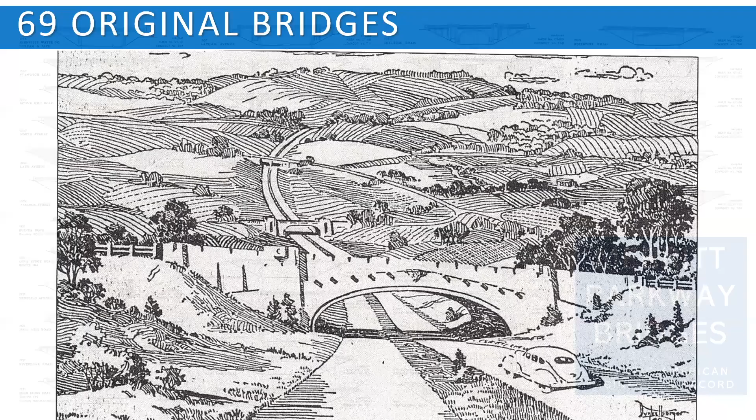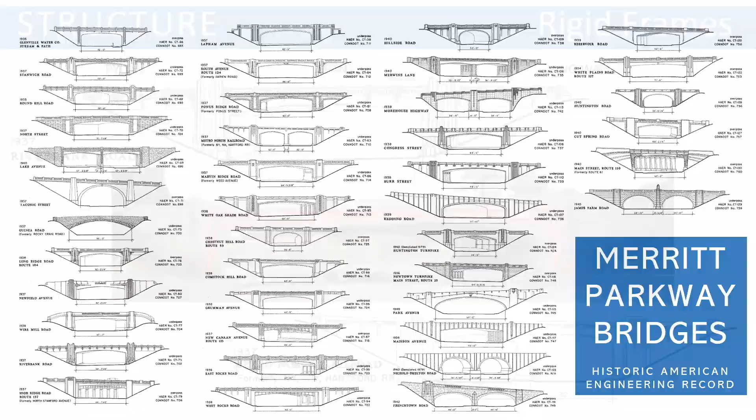Each of the bridges on the Parkway was done to a different design. No 2 are alike. They deploy mostly the same structural system, but they are given a completely different architectural treatment. Tonight we're going to focus on how the architect who designed them really dressed them up in different ways.

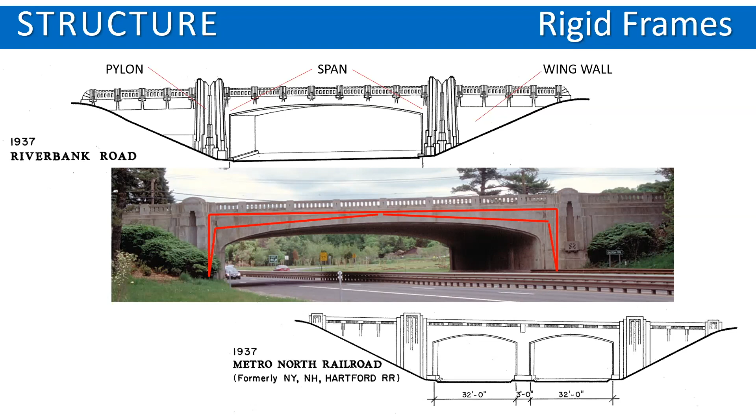The structural system that is used is no longer used in constructing bridges, but it was a very modern system in the 1930s. It's called a rigid frame. In the center image here, the red lines outline the shape of the steel that's embedded within the concrete. So these are a form of reinforced concrete bridges that have structural framing within it that's made out of steel. As you can see, the way that the steel is laid out, because it gets narrower towards the center of the span, it lends itself to forming the openings as arches. The architect of the Parkway Bridges made very good use of that arched form throughout the Parkway Bridges.

There are some other structural systems used in very minor quantities on the Parkway. These are all contemporary with what was going on in Europe at the time, the German Autobahn, which is up in the upper left-hand corner. That would become the design standard for the interstate highway system in the 1950s, but it wasn't really used on the Parkway. You can look up at the upper left corner and see the future that was going on in Europe, but it was actually rejected by the design intent of the Merritt Parkway.

There are a couple of basically post and beam bridges, and one of those is at Riversville Road. You drive over that when you're on the Parkway, so you don't actually see it unless you're underneath the Parkway. And there are only a couple of structural arches that are used on the Parkway.

One of those is the Guinea Road Bridge in Stamford, which was one of the earliest bridges. The Parkway Commission that oversaw the work originally wanted to dress up most of the Parkway bridges in stone, but the cost of this bridge came in so high that they decided they would go to concrete afterwards to save money.

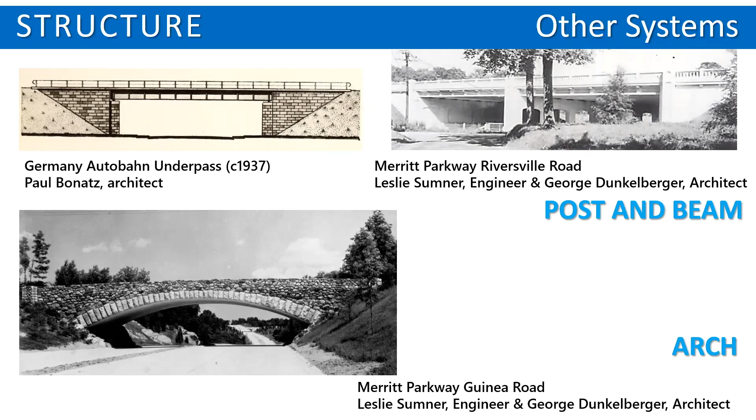It was designed in conjunction by the civil engineer on the project, Leslie Sumner, who was a brilliant civil engineer who did many, many other bridges around Connecticut, and George Dunkelberger, an architect whose primary body of work is limited to the Merritt Parkway, to the bridges and the service areas that were originally designed as gas stations on the Parkway.

One of the biggest accomplishments, the largest span and the highest span that the Parkway needed was across the Saugatuck River—not necessarily the largest river in Fairfield County, but where the Parkway met the river, it didn't make sense to bring the Parkway down to the river and go with a smaller bridge. So they spanned it with a larger type of bridge called an open spandrel arch system.

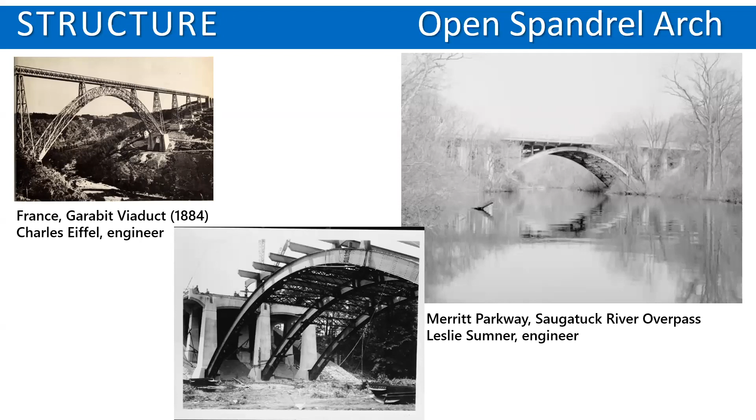That was pioneered by Gustave Eiffel of the Eiffel Tower fame and used about 50 years later on the Parkway. It's the same structural principles. It's a very beautiful bridge, but you only really get to see it if you're in a kayak or canoe down on the Saugatuck River. You drive over it most of the time without ever knowing you're on this beautiful bridge. The architect was George Dunkelberger.

He was a native of Camden, New Jersey. He came up in a working class family. He went to Drexel Institute, which was one of three institutions set up to help people of modest means get an education in a practical profession. Drexel is like Pratt Institute and Cooper Union in that sense. Drexel was different because it gave a very rounded, liberal arts menu of courses, as well as what you wanted to focus on. Dunkelberger focused on architecture, but he got a very well-rounded education there, so he was pretty well read in the classics and other things.

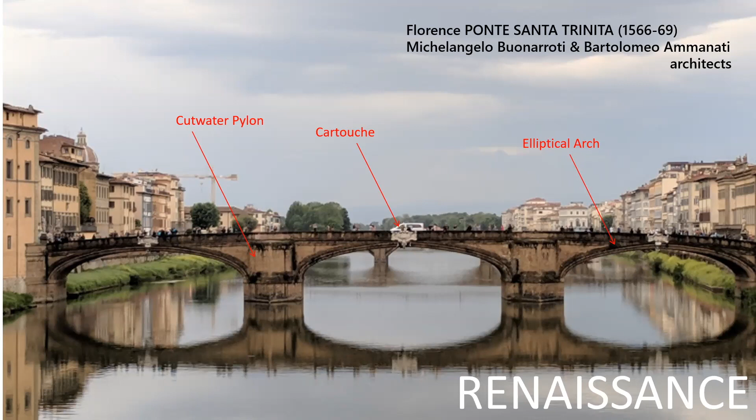In the center of the span, Renaissance architects often used a feature called a cartouche, some sort of medallion, a symbolic medallion that had maybe the city symbol on it or some inscription. Michelangelo used one here, and Dunkelberger used the State Seal of Connecticut as a cartouche on many of the Merritt Parkway bridges.

The very famous New York firm of McKim, Mead and White had just finished the bridge that runs between Washington, D.C. and Arlington Cemetery, done very much like Michelangelo's bridge, with large elliptical arches and medallions and relief sculpture in between the piers. Dunkelberger uses that same sort of treatment on a couple of bridges.

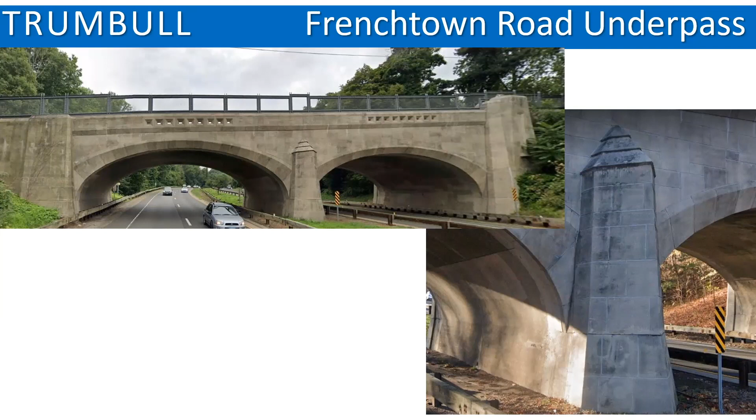In Trumbull, I mentioned cutwaters before. The Frenchtown Road bridge has one of those cutwaters, and obviously it's not dividing any water, but it's just an architectural feature found in many Renaissance bridges in Paris, Italy, and London. This is all cast stone. It's a very, very beautiful bridge.

Another thing the Italians did in the Renaissance was ornament their bridges, beginning in Venice, with relief sculpture—using the bridges as a canvas for three-dimensional relief sculpture symbolizing different things, not just cartouches, but actually embellishing them. You'll find this a lot on the Merritt Parkway bridges, which we'll be looking at in a minute.

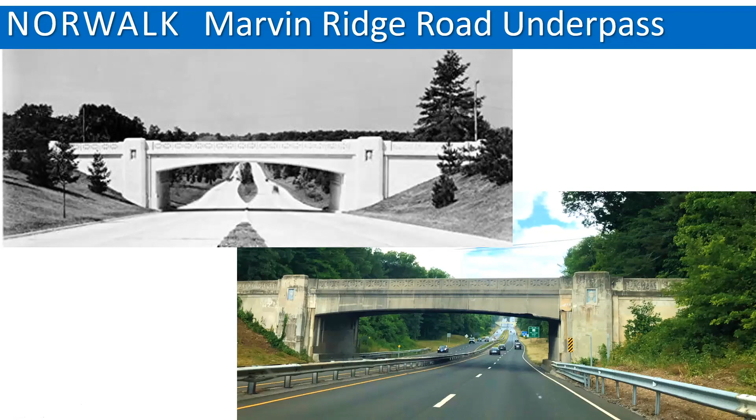The Marvin Ridge Underpass in Norwalk is one that's scheduled for restoration beginning next year. It is a bridge that has a balustrade that's really all solid concrete, and the only decorative feature on it are these little inset urns set in a blue field that will be restored as well. So that's the kind of relief sculpture that Dunkelberger did in his more simple and pulled-back mode. Here it is, a detail of it, sort of a neoclassical Adam-esque urn.

Then we move on to the Art Deco bridges. Dunkelberger was taking a lot of his ideas for massing the terminations of the spans, where they either met at the median or over on the shoulders, from contemporary architecture. Rockefeller Center and the New Yorker Hotel really convey the way urban planning was moving toward having a lot of setbacks in skyscrapers, creating these heavy buildings with dramatic shadow play of setbacks and sculpture. Even contemporary sculpture was starting to imitate that. So Dunkelberger was riffing on all of that in the way he modeled some of his less classical and some of his more Art Deco bridges.

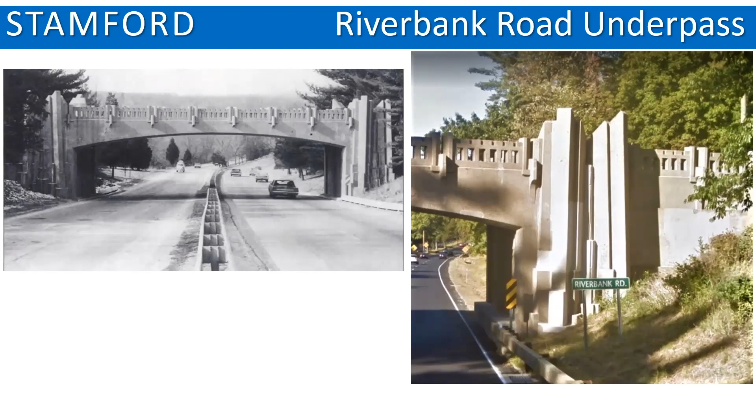Riverbank Road underpass is a very chaste Art Deco. You can see how where the bridge hits the shoulders, called wing walls, Dunkelberger sets them back in a series of receding planes on this bridge. That's very simple, but not really done at all commonly. It didn't really cost all that more, but it adds a lot of architectural interest to what would otherwise be a pretty simple concrete bridge.

Then with the pylons holding the span, where all the load is being transferred, he puts in these very simple vertical flutes. So it's a wonderful composition with a lot of cool shadow play on it. This is what it looks like today in a photograph, where you can see some of the horizontal elements a little better, and some rounded elements on the balustrade, and also a cartouche in the middle of it.

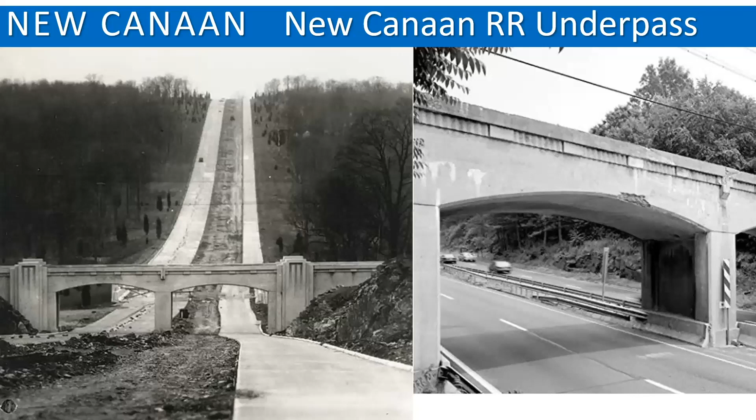The New Canaan Railroad underpass is where the Metro North Line to New Canaan crosses the Parkway. Because that was a much heavier bridge, he put a center span in on the median. Only a few bridges have center spans on the Parkway, and this one was because it carried a railroad train across it. But it's still a very simple and elegant Art Deco design.

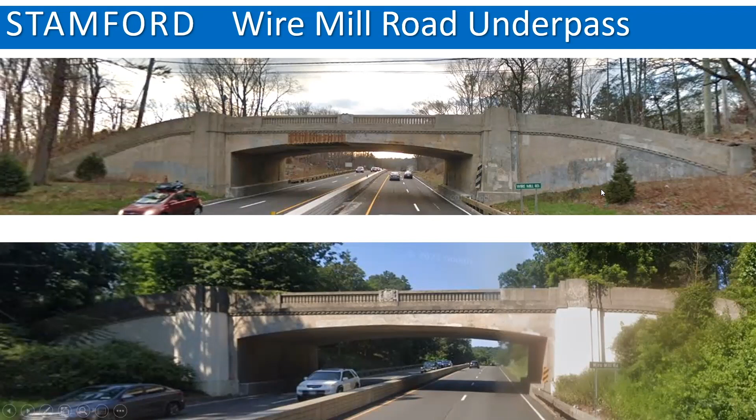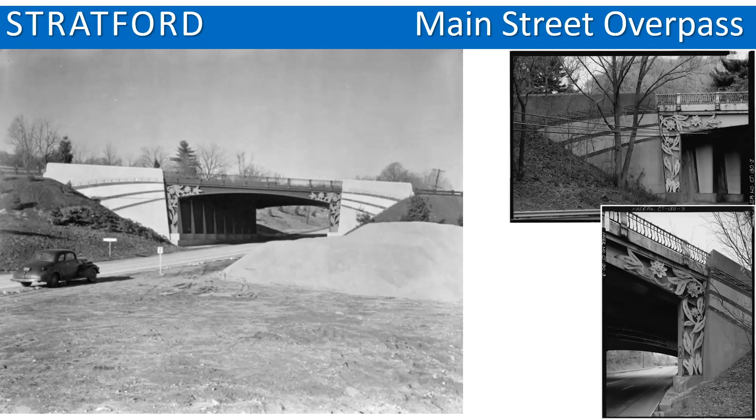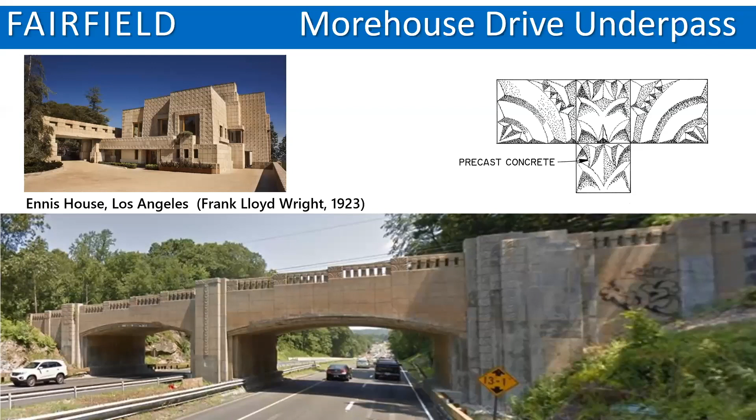Frank Lloyd Wright had designed a building in Los Angeles in 1923 using precast blocks with a kind of Inca-Aztec motif in them. And the Morehouse Drive Bridge that Dunkelberger designed takes its cue from that in the railings and some of the treatment on the bridge. It's really quite an interesting and unusual bridge.

It sort of stands apart from all the other bridges on the Parkway in its shape, and it steps up the hill to make a change in grade between the two sides of the Parkway, with this very primitive-looking form of decoration.

The relief sculpture that I mentioned that came from Paris is all over the Parkway bridges in different ways, the urn we saw earlier, the fountain motif. It's just a feast for the eyes. When I was in high school driving it for the first time, it seemed like every couple of days I'd notice a new bridge, or a bridge I'd gone under many times, but I'd notice it because the light would hit it differently and the details would pop. I think it makes driving a real pleasure on the Parkway.

It was also common during the 20s and 30s to introduce relief sculpture symbolizing different aspects of Western civilization onto buildings. At Rockefeller Center, the design team had a history of artisans and tradesmen on a band around the base, representing the different trades that went into constructing the building.

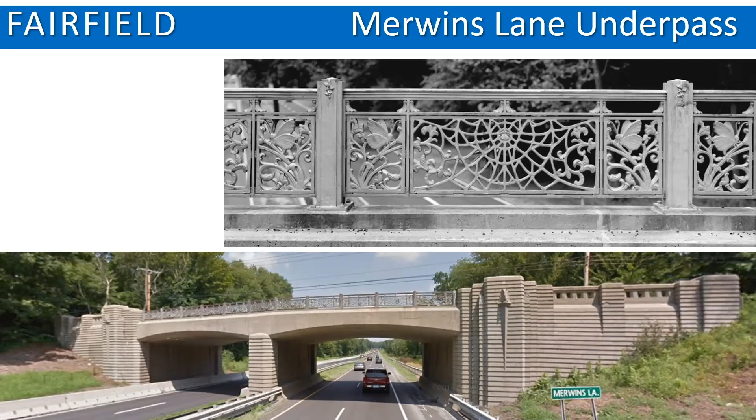One of my favorites is Merwins Lane. I've always loved this bridge. Instead of just having relief sculpture like some of the earlier bridges, this bridge almost becomes a complete work of sculpture in itself. I'm not really sure if he was trying to simulate waves of water, or a kind of wave of textiles across the bridge, but it looks like a folded textile. It looks almost like it could just be blowing in the wind up there. It's really quite a beautiful bridge, but with just a couple of little classical references in the wing wall. A very, very lovely bridge.

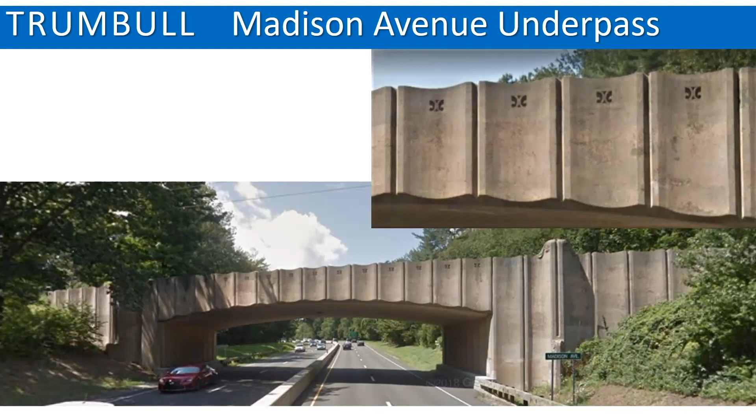I want to walk you through a couple of restoration projects we've done recently. If you've seen projects where we've done patching, sometimes when we come to a bridge that doesn't need a lot of patching, we'll just do cleaning. The science of cleaning has gotten quite good and portable. The bridges are blasted with pieces of sponge, and the sponge absorbs all the surface dirt and pollution without eroding the surface of the bridge.

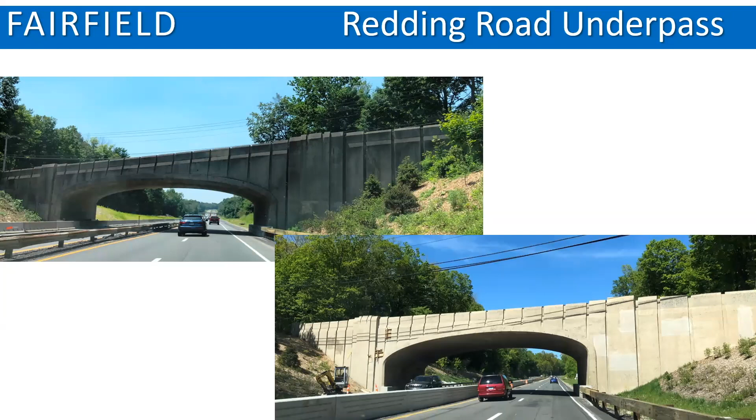This is the Redding Road Underpass, a very simple but elegant bridge in Fairfield that was sponge blasted about two years ago. Here's the before and after, showing how well it cleaned up.

One of the major bridges we recently did was the Lake Avenue Bridge in Greenwich. This was one of the last bridges put on the Parkway, and it was unusual because it had more cast iron than all the other bridges. The steel span had been determined structurally deficient since about 2012, when we went in and did material investigation on the ironwork to try to determine the original paint scheme. We found traces of the paint.

We hired an architectural conservator from New York. She took samples, looked under the microscope, and matched the colors of the original bridge exactly, and that's how it turned out. This bridge was completely taken apart, all the cast iron was taken off. Cast iron is very brittle, and we were afraid it would break, but the contractor was excellent and handled it with kid gloves. They took it to a shop, had it sponge blasted down to bare metal, and then painted with numerous layers matching the original color scheme.

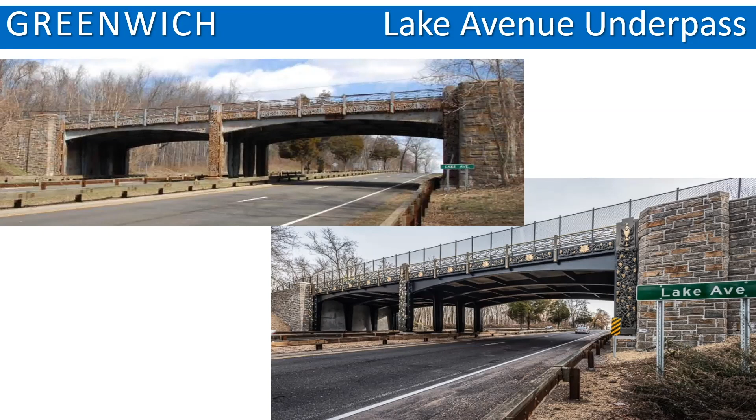The bridge was completed ahead of schedule, which was really important because the entire span had to be taken out of service for the period it was being restored. It was a happy day when the Conservancy, DOT, the contractor, and local politicians all got together, and we reopened the bridge about a week ahead of schedule. The bridge was used by school buses, which could start rolling again without a very elaborate detour.

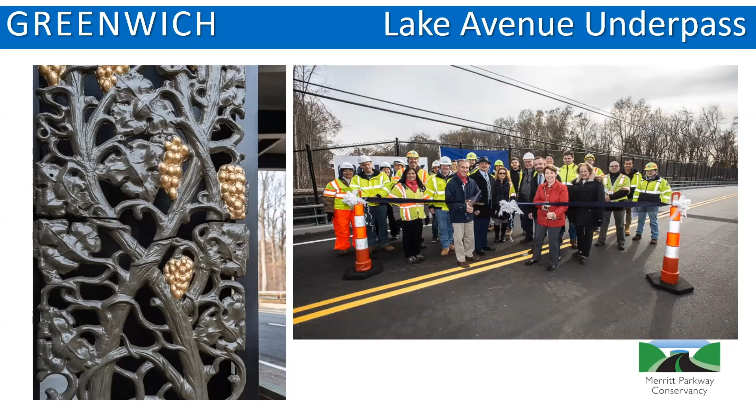Our most recent completed project is the Clinton Avenue Bridge, one of the most unusual bridges on the Parkway. The concrete on this bridge was originally two-toned. Those little diamonds at the top, on the left and right, were inset pieces of red mortar with red glass set in them, so that at night when you drove by, they'd have a little bit of reflectance.

They got lost over the years and were basically painted over. But we found evidence of them and matched the color exactly with the glass shards in them. We matched the mortar around them, which was meant to look like Stony Creek granite, that beautiful pink granite you get down near Guilford and Branford. Then we painted the lower sections with a mineral paint matched to the color scheme above.

This is what the finished bridge looks like. It reopened just a couple of months ago. It was never taken out of service, but the contractor completed the project a couple of months ago.